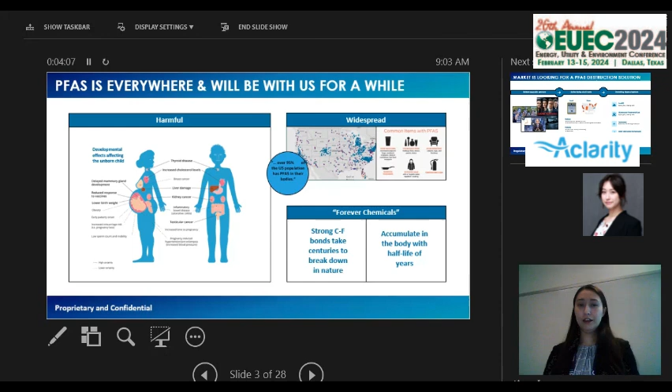And because of these linkages to human health effects, PFAS has made it into the public eye, and there has been a lot of pressure on the EPA to regulate these compounds in drinking water, wastewater, and industrial waste. There are currently no federal regulations yet. However, according to the EPA's PFAS strategic roadmap, they should be coming out with a ruling in the next year or two.

And some local and state governments have taken it upon themselves to put in regulations of their own, starting to regulate PFAS discharges in drinking water, wastewater, and industrial wastes, such as landfill leachates. And the most recent infrastructure bill did set aside $10 billion for PFAS monitoring and remediation. But what exactly does remediation look like? What solutions are available for treating PFAS-laden waste streams?

I come from the wastewater treatment space, and the options for PFAS treatment are quite limited. There are a few sequestration technologies that do a great job at filtering out PFAS from water. This allows drinking water plants to safely discharge to piping systems and allows wastewater treatment plants to safely discharge to the environment, but you're still left with essentially this filter media or this very concentrated liquid side stream that's now saturated with PFAS, and currently our solution is to take that PFAS and essentially send it somewhere else.

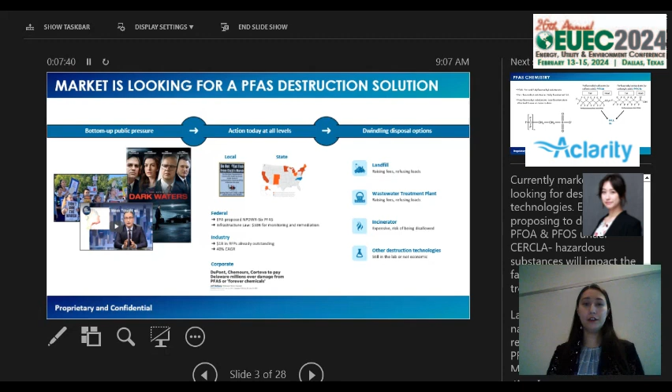And then with deep well injection, there is the threat of aquifer contamination, but we can argue about the validity of those claims. No matter, that's still only 3 tools in your toolbox for PFAS remediation. So that is essentially why the market is looking for a PFAS destruction solution.

So a little bit about PFAS chemistry. PFAS are characterized by a hydrophobic carbon-fluorine chained tail and a hydrophilic functional group as its head. 2 main types of functional groups are the sulfonic acids and the carboxylic acids, and there are many variations of these functional groups and many different chain lengths, so this attributes to tens of thousands of different PFAS species.

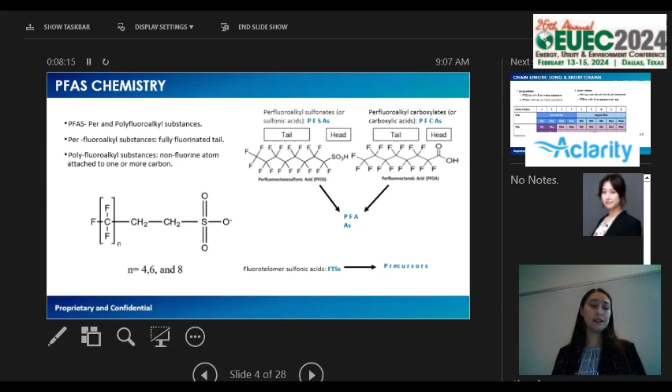And it's just important that I mention the chain length because in some regulation, sometimes chain length will be referred to, and also the removal efficiency of certain sequestration and destruction technologies can vary based on the chain length.

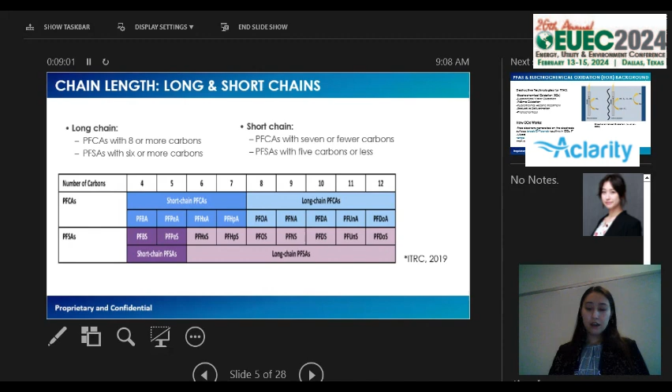In the electrochemical oxidation process, a charge jumps from the anode to the cathode, and in that process, a free electron is generated on the surface of the anode. The PFAS in the water must come in contact with the anode surface in order for the carbon-fluorine bond to be broken and the PFAS to be oxidized.

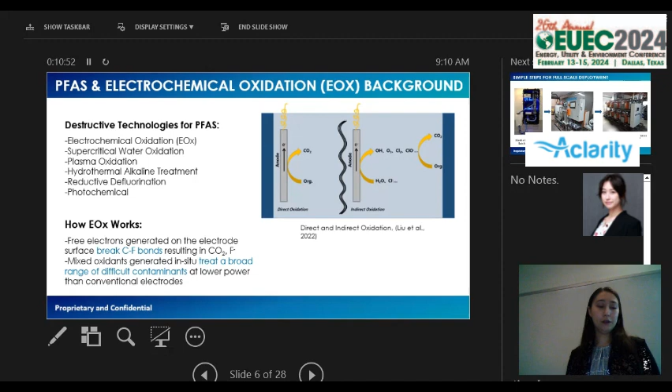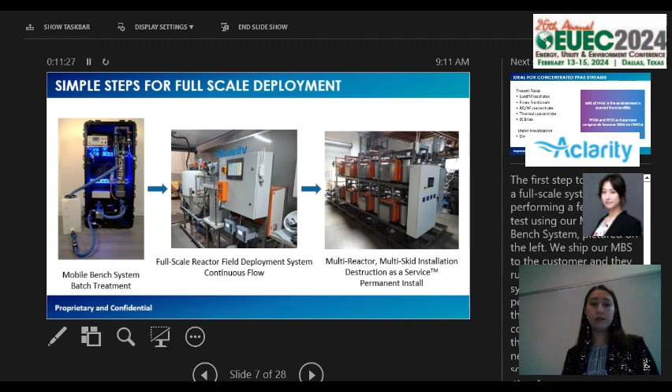So this is a picture of multiple electrochemical oxidation systems that are used to treat PFAS. This presentation will showcase bench scale and pilot scale case studies. So the left is a bench treatment system that operates in batch mode, the middle is a continuous flow pilot scale system, and then on the right would be a permanent installation, so someone's full scale, large scale system.

So as I mentioned before, there are filtration and sequestration technologies that do a very good job at taking PFAS out of water streams, such as granular activated carbon, reverse osmosis, nanofiltration, ion exchange, and foam fractionation, and they are currently being used in drinking water, wastewater, and industrial waste treatment plants today. In one way or another, these will create a saturated media or a side stream that must be disposed of.

So concentrating PFAS before sending it to a destruction technology has been the most economical solution thus far, and these streams are the focus of the presentation, landfill leachate specifically. And the reason why we care so much about leachate is because despite landfills not being a producer of PFAS, they unfortunately are a receiver of PFAS wastes, whether that's from household items, firefighting foams, or any of the side streams listed here.

They are a huge PFAS sink, with 50% of PFAS in the environment being sourced by landfills. And all of these streams will be regulated if PFOA and PFOS are classified as hazardous compounds under CERCLA, which we project will happen in the summer of 2024 according to the EPA's PFAS strategic roadmap.

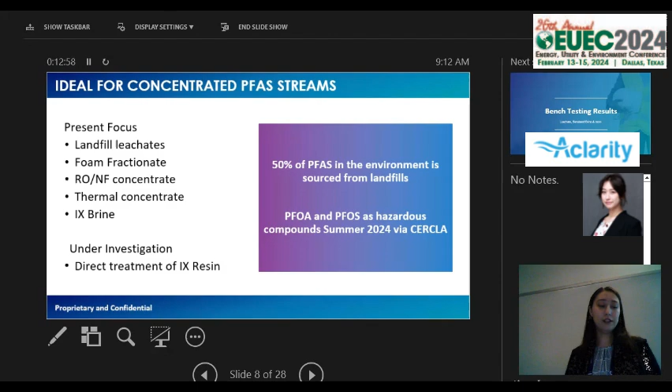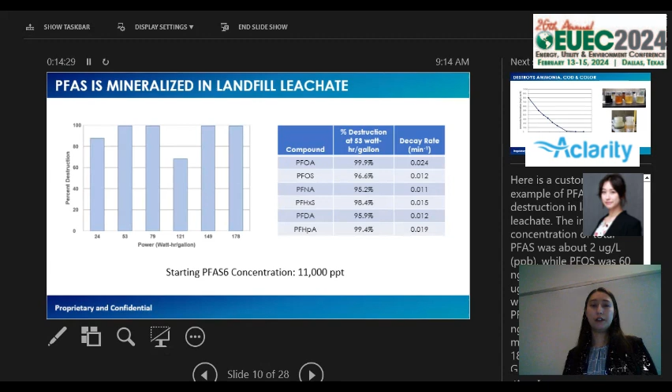So if you think about how much 53 watt hours per gallon is, you probably have a 50 watt light bulb in your home right now. If you were to stick that light bulb into 1 gallon of water and leave it there for an hour, you will have degraded, according to this example, 11,000 ppt or nanograms per liter of PFAS, over 95% for each species. So that equates to pennies per gallon in operational costs.

And not only are we destroying PFAS, electrochemical oxidation is agnostic to any organic in the water, so we are destroying ammonia, in this example, at the hundreds of milligram per liter range down to non-detectable levels by about 75 watt hours per gallon. Also destroying COD and generally any organic in the water that attributes to the nice black color that is raw landfill leachate on the left of these pictures. And then on the right is treated landfill leachate. We like to say at Aclarity that this looks like a nice flight of beers.

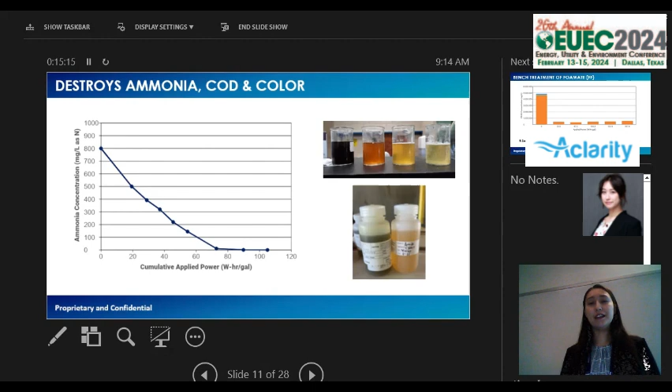And then for bench treatment of foamate, which is a significantly higher starting concentration of PFAS, we still have nanograms per liter here, or PPT, but this is about 5 million, so about 5 milligrams per liter or parts per million starting concentration of just these 6 compounds totaling. And we're taking that down to less than half a milligram per liter by 67.2 watt hours per gallon.

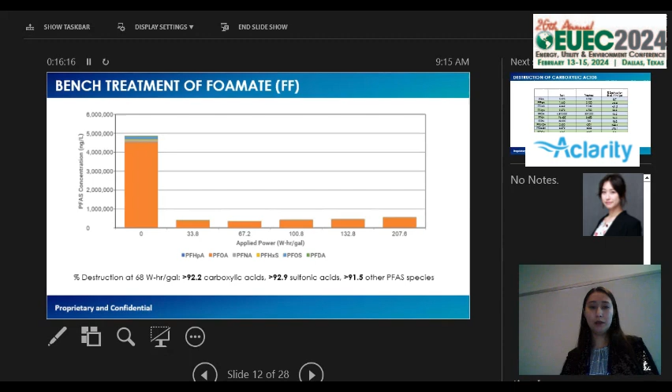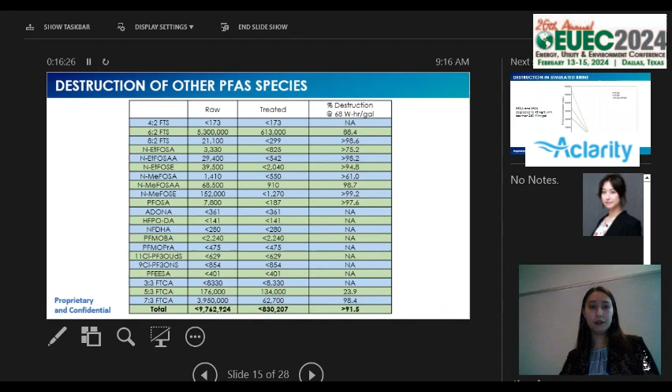And the percent destruction at 68 watt hours per gallon is above 90% for the sulfonic acids, the carboxylic acids, and all of the other PFAS species. What I like about this is as we continue to apply power, we do not see a greater percent destruction. So 67.2 is the optimal applied power. And then here just some raw and treated of the previous slide. We can go back if anyone wants to see that.

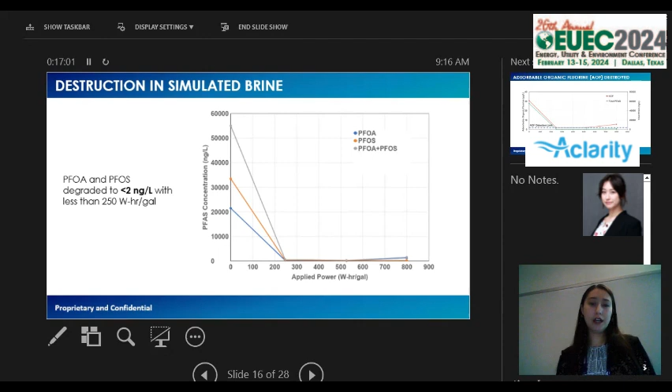We did a simulated brine as another bench test. We seeded the water with PFOA and PFOS to about 55,000 ppt, and by 250 watt hours per gallon, so about 5 light bulbs, we took it down to below the detection limit for liquid chromatography mass spectroscopy machines, which is about 2 nanograms per liter. And then you see actually at 800 watt hours per gallon, an increase in PFAS concentration, which you can also see here.

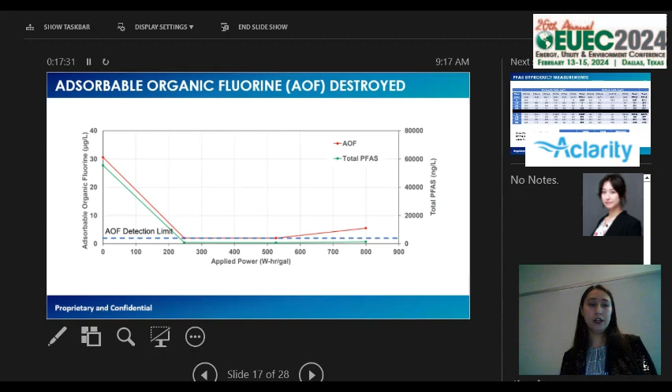We do adsorbable organic fluorine, which is basically the amount of fluorine bound to carbon, and it's a good indicator of how much PFAS we're destroying, also a much cheaper test. But we see we're actually getting an increase in PFAS if we apply too much power, which just goes to show that the optimal applied power is of low energy, 250 watt-hours per gallon. And that's a table for that. But I think I'm kind of running out of time, so go to the pilot tests.

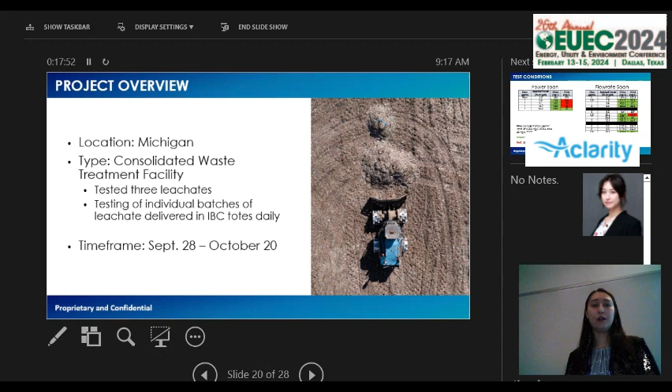We usually do pilots for about 1 month. A lot of them are in leachate, so we were at a facility in Michigan, a consolidated waste treatment facility. We were treating 3 leachate streams. A lot of times when we do pilot tests, we will keep the flow rate constant and then vary the applied power, or we will keep the power constant and vary the flow rate.

And for this client, their permit limits were 2,300 nanograms per liter of PFOA and 60 nanograms per liter of PFOS. In all of these examples, they were already below their permit limits for PFOA, so PFOS was the controlling contaminant. And at 26.2 watt-hours per gallon for the power scan, we were able to take it down to below their permit limits for PFOS. And then for the flow rate scan, we found that half a gallon per minute or 1 gallon per minute through this pilot system was optimal for reaching their permit limits.

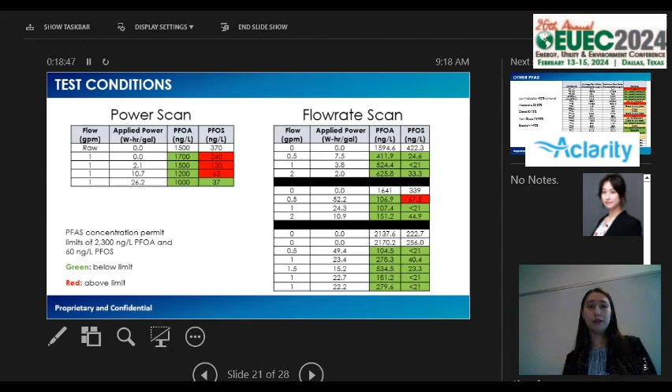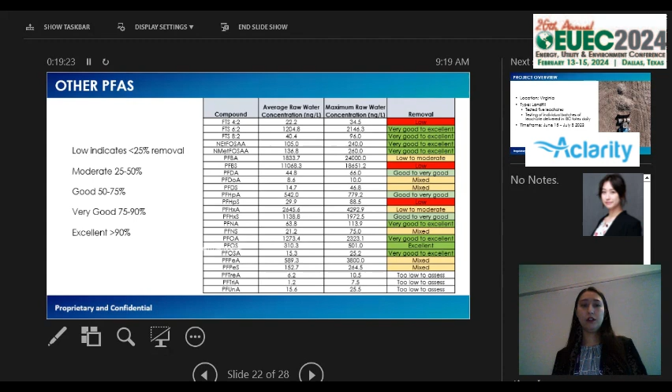And then the client did only care about PFOA and PFOS because that's what they were regulated on, but for the lab analysis method using LCMS technology, we do also get to analyze all of these other compounds. Some are long chains, some are short chains, and with the applied power that we found was best for destroying PFOA and PFOS, we were also able to get very good to excellent removal in both long chains and short chains for some of these compounds.

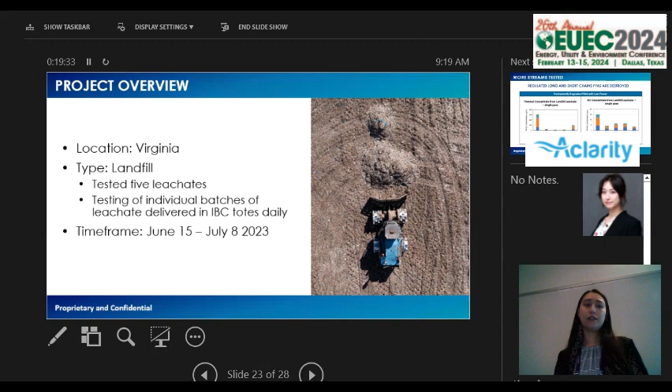And then just one more, we tested 5 leachates for about a month in a landfill in Virginia. 2 of those streams are actually a thermal concentrate from a leachate and a reverse osmosis concentrate from a leachate. Now we're looking at micrograms per liter, so parts per billion concentration, and 6.3 watt-hours per gallon, which is a fraction of a light bulb.

We're taking the thermal concentrate down to below, I'd say, 20 parts per billion. Not as great results for the reverse osmosis concentrate, but still, as the power increases, we're not really seeing any greater percent destruction.

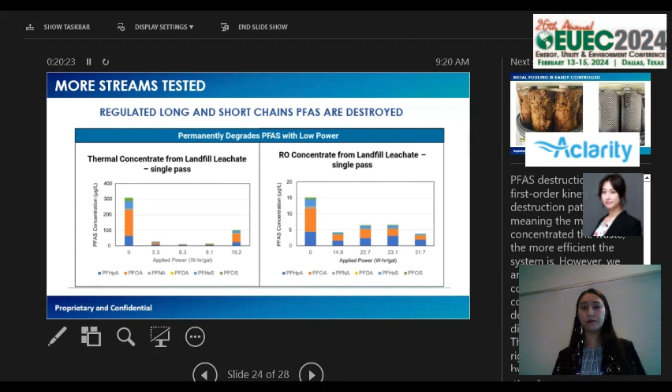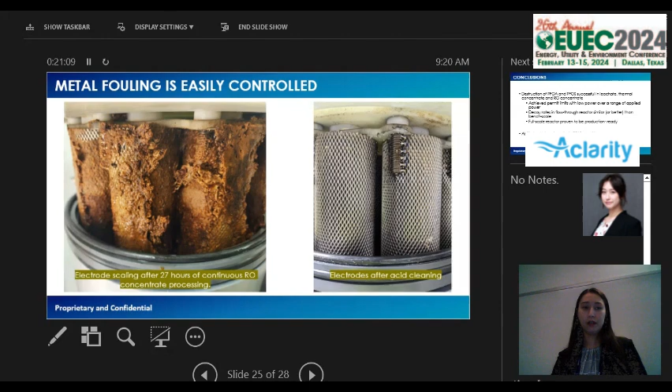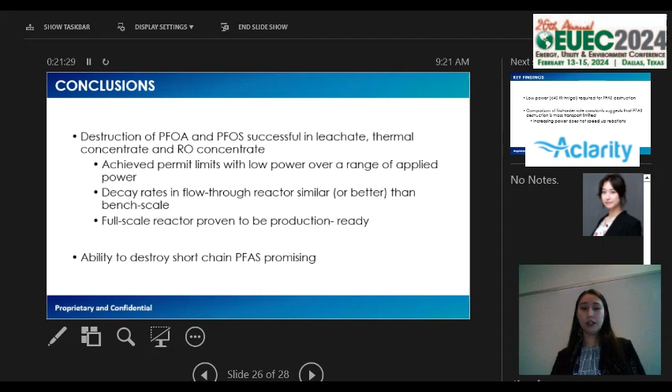So in conclusion, with the right power settings, we're able to destroy PFOA and PFOS for our clients down to their permit limits in leachate, thermal concentrate, and reverse osmosis concentrate. We are destroying short chains as well as long chains, and we're doing this at a very low power, about 40 watt-hours per gallon. Again, equates to maybe pennies per gallon in operating cost.

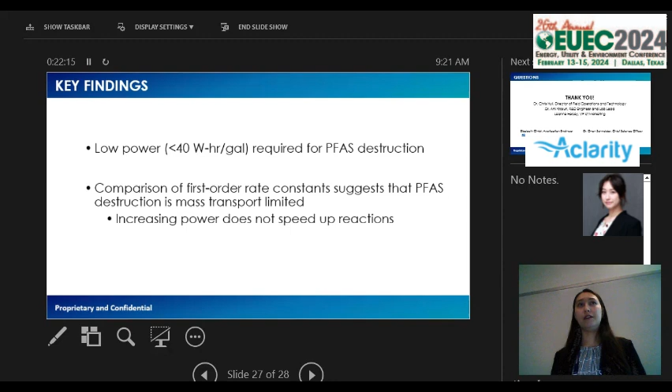And then just another side note I think is really cool. When we compare the rate constants, and PFAS degradation is a first-order reaction, when we compare the rate constants between tests of different applied powers, we do not see a speed up of reactions. So that shows that PFAS destruction is mass transport limited, meaning it's all about how much PFAS you can get to the surface of the anode, rather than how much power you can apply to the system.

So thank you guys so much. It was 2 minutes over, but if anyone in here or anyone knows of people who are receiving that $10 billion worth of remediation from the last infrastructure bill, you can tell them to look into destruction as an option for disposal. So thank you guys so much. Any questions?

Do you use any catalysts in the process? We use certain additives sometimes. That is still an R&D operation, so all of these examples here that you've seen do not use any catalysts.

Awesome. Before this presentation, how many of you guys have heard of PFAS? Okay, awesome. Yeah, I just want to gauge because I really wasn't sure how far back in the history of PFAS I am going, and whether or not people here are just learning about it, or they're in the process of looking for solutions, and kind of what the market is looking like right now. But thank you so much. Yeah.